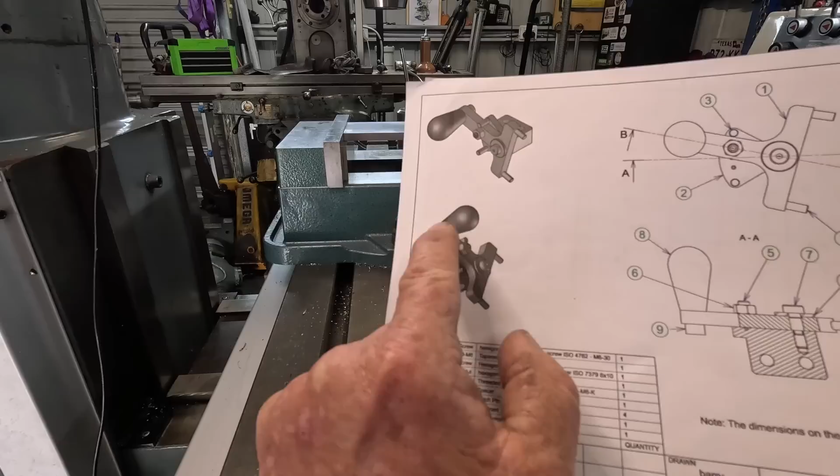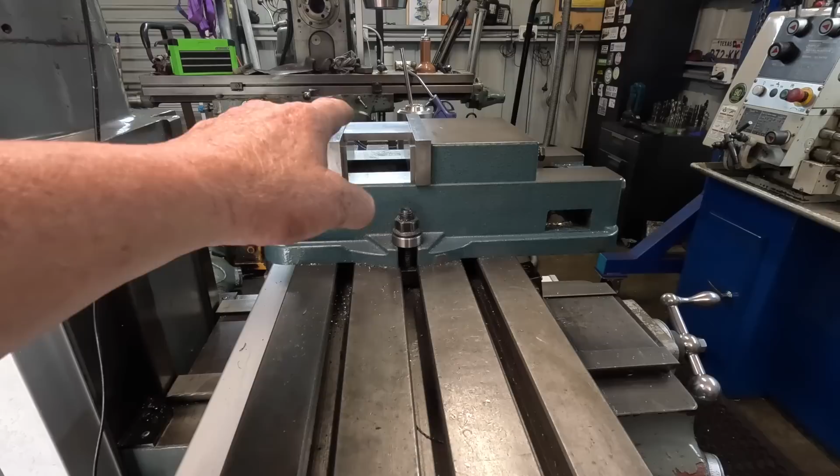So the first part I am going to build is this T handle, this T section. The big radius in this corner here is 12 mil, I think, so 24 mil hole - I'm going to bore that with the 2-inch boring head. I've set it up in the mill already, indicated and found the center line, and I'm using this back face here as a datum. So I've worked out where I've got to be in space to do these two 24 mil holes, and I've already put in these two 3.5 millimeter threaded holes in the very end of it.

I drilled that out 7/8, then I've just done a clean up pass with the boring head.

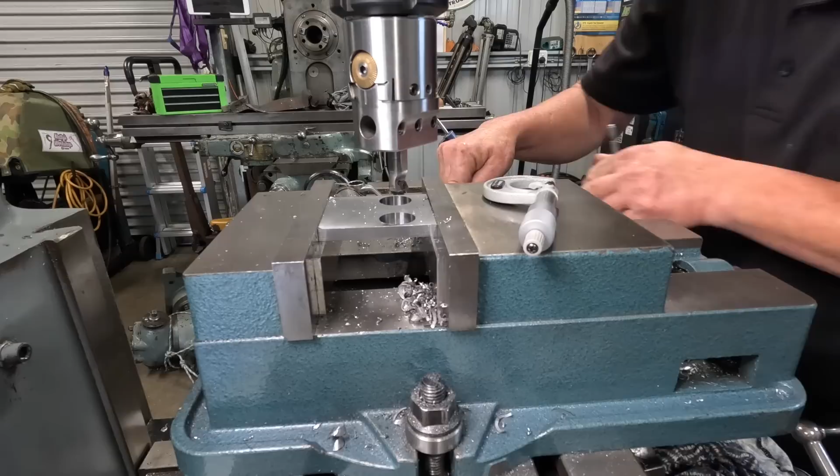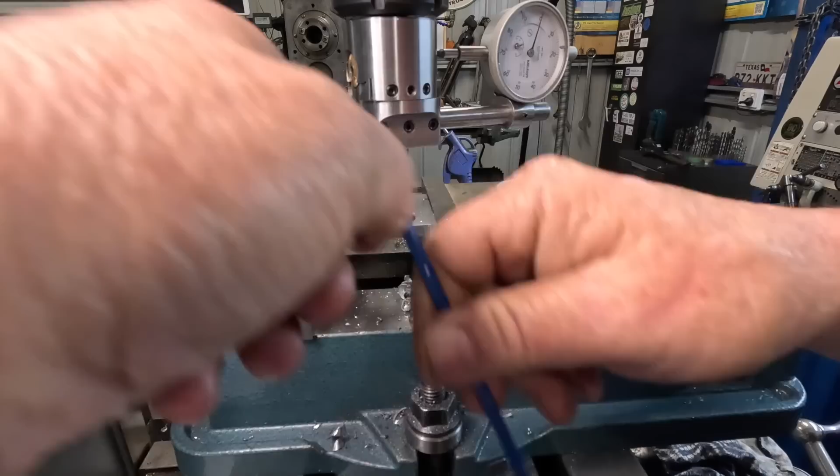.94, divide that by 2, so 0.47 to come out each side. I absolutely love that auto power feed on that quill. .24 on the knocker - pretty happy with that.

Okay, while it's set up in this position and I know where I am on centre and all that, there's some holes to put in - 3 holes on centre line. This first hole is a reamed 6mm hole. That drill bit could do with a sharpen, I reckon. This next hole here is a tapped M6. This next one is a straight M6.

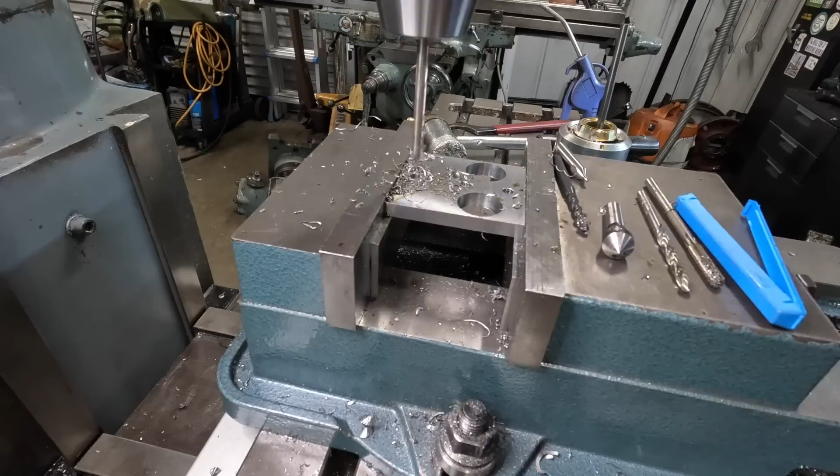So now this can be taken out, set back up on its side and start milling out all this section here. This piece in the middle will end up being 14 mil.

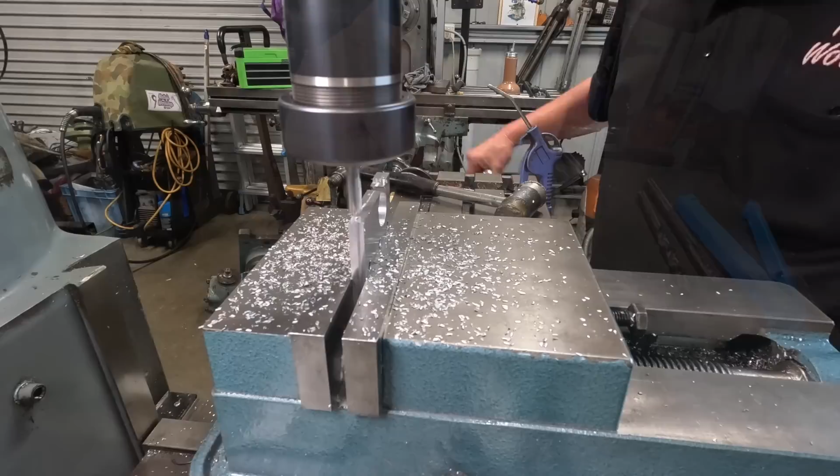Okay, I've got an apology. I set the camera to record and didn't realise, didn't hear the camera beep, but it went flat, so I missed doing this. Anyway, what do? I've got to do the other side anyway, so I do apologise for that - you really just didn't miss a hell of a lot. I've still got to radius this corner here yet.

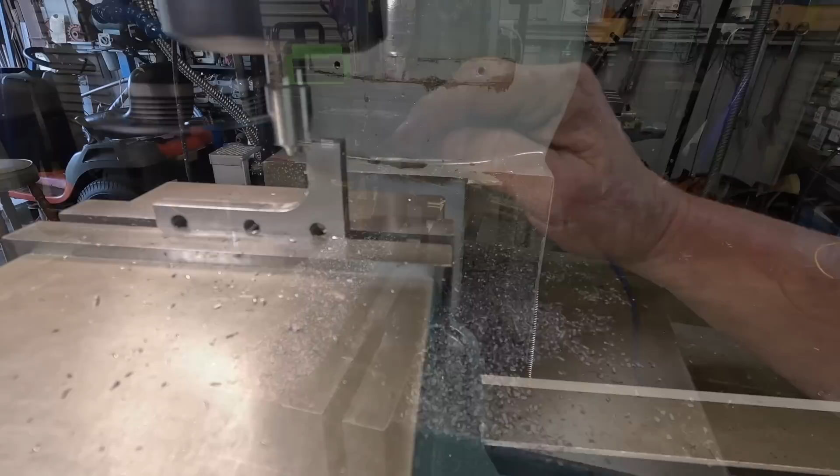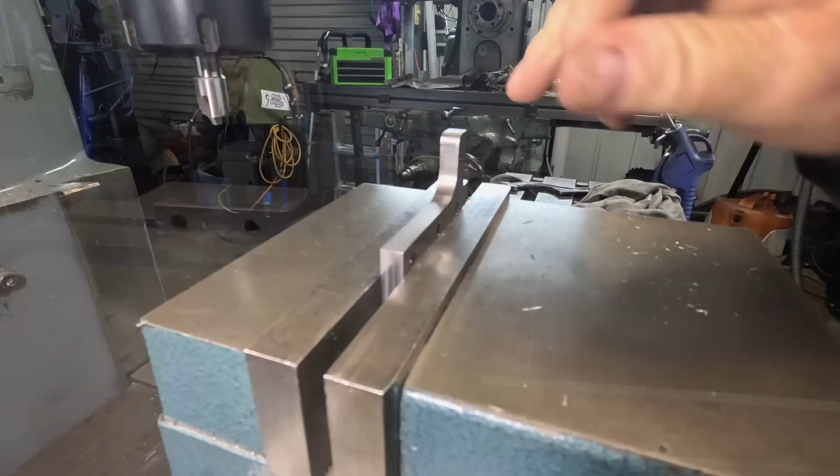Take this out now, flip it over, and hopefully machine the other side of it on camera.

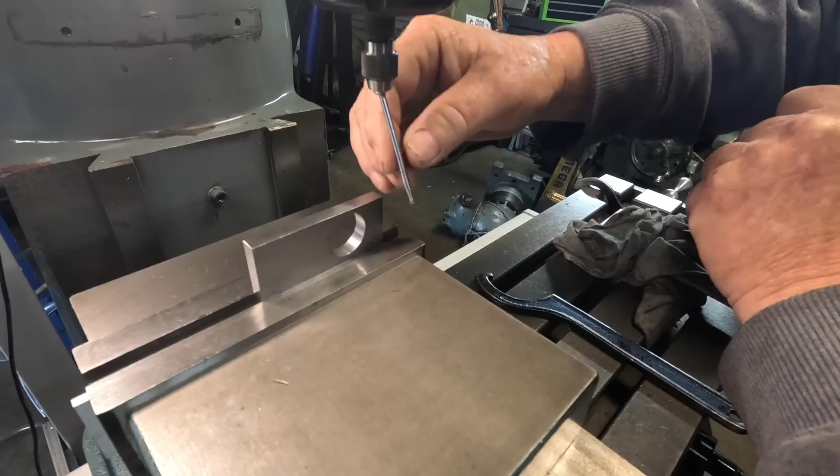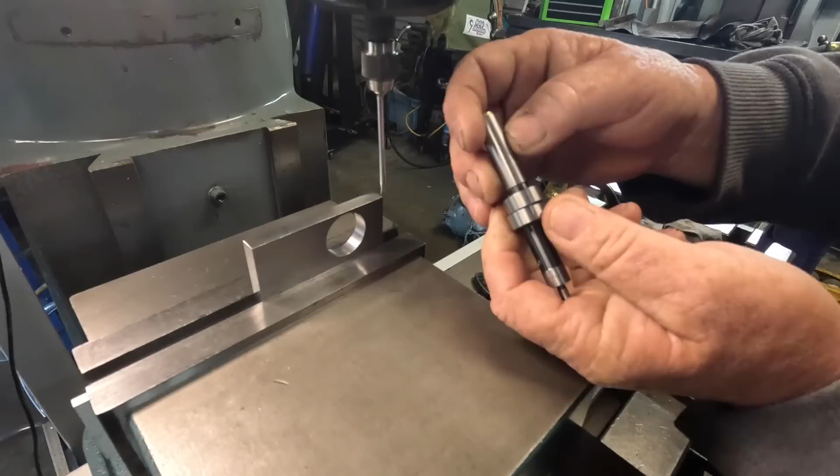I've had to go back to using this regular - it's a Starrett body and just a cheap tip. This is a Vertex edge finder and I can't get it to repeat. It's a mile off - you can set the 0, come back in, it doesn't matter how many times you do it, and it's way off. Now I pulled it apart, lapped the two faces on flat stones, just in case there was a little burr, and for some reason I'm just not confident with it. So I think it's time for the bin and time for a new one.

A bit of a fang around with a file and that'll look as good as gold.

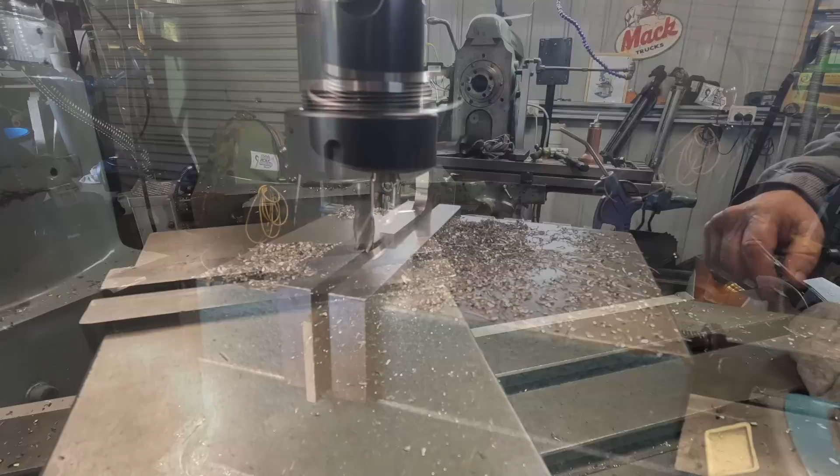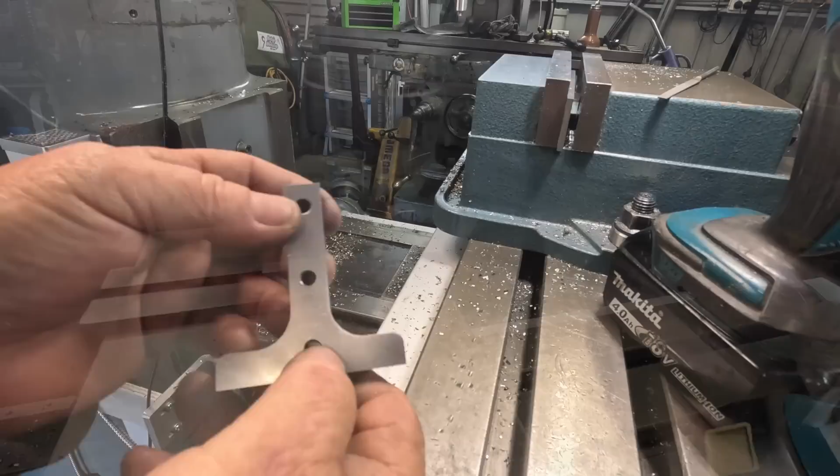So that's the part so far, it came up okay. Next time I have the rotary table set up, I'll radius the top of here. I could just make up a couple of button dies and put in there and file it - it's probably quicker to do it that way than it is to screw around setting up on the rotary table.

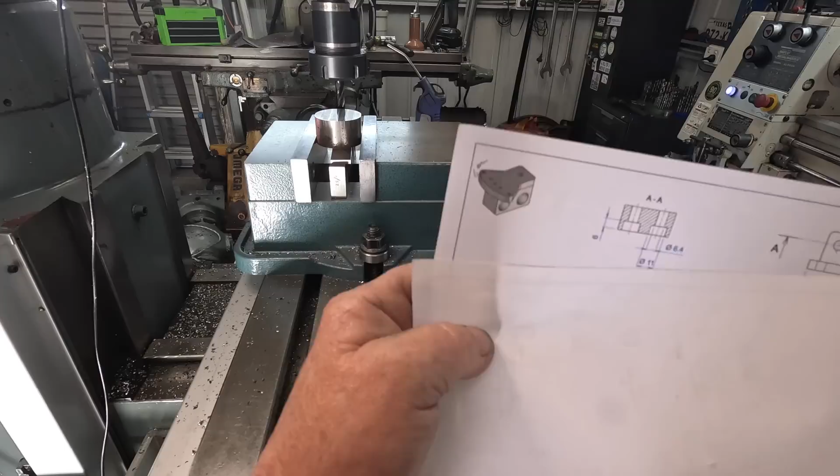Okay, this is the next part we're going to build. It's called a quadrant. There's a bit going on with this part too - got to be super careful and get this one really correct.

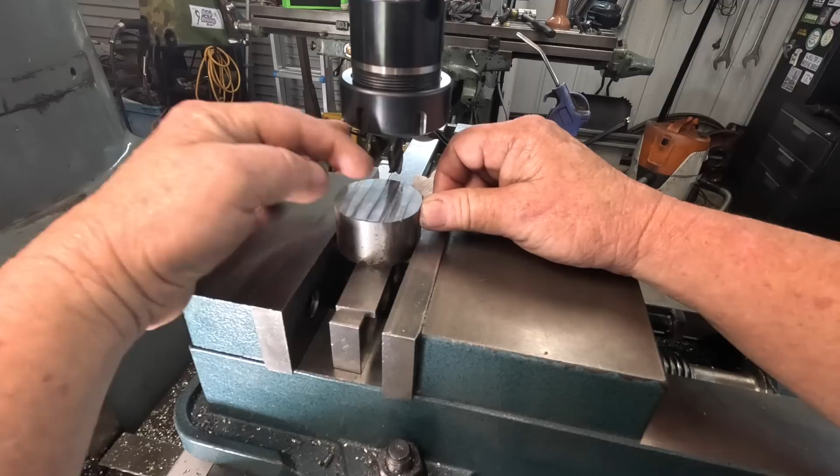So the way I've decided to hold this, because I don't have a V-block suitable, I form two flats on each side, edge find off these two flats, which put me in the middle. This first rectangle that we're going to form is 16 mil wide, so I can offset 13 mil each side of centre. It's 20 mil deep, which I have 20 mil sticking out of the jaws, and I can form these two sides.

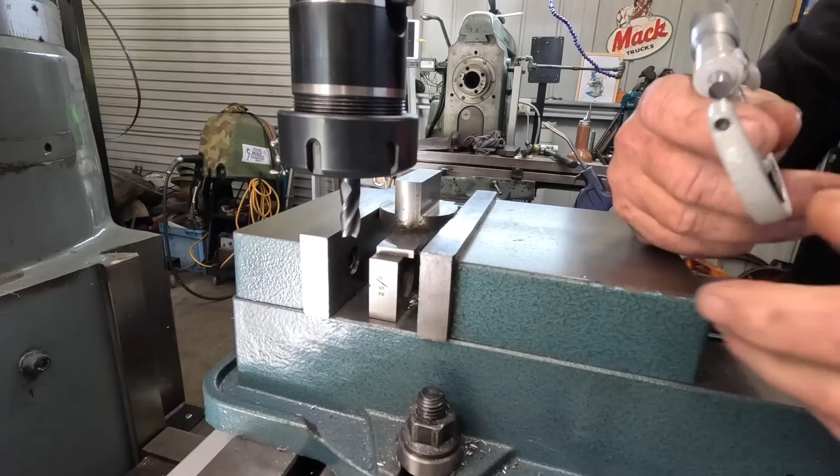This should be, theoretically speaking, right on 16. That's not bad. I'm absolutely loving this DRO.

Okay, what I've done there, the top piece of this quadrant, the back end of it, where it is square, is 19mm wide. So I've put a witness mark there, because I've got to flatten the back of this off, square this off at the back here. When this squares up and it's a full square across and matches up with these corners, I've gone far enough.

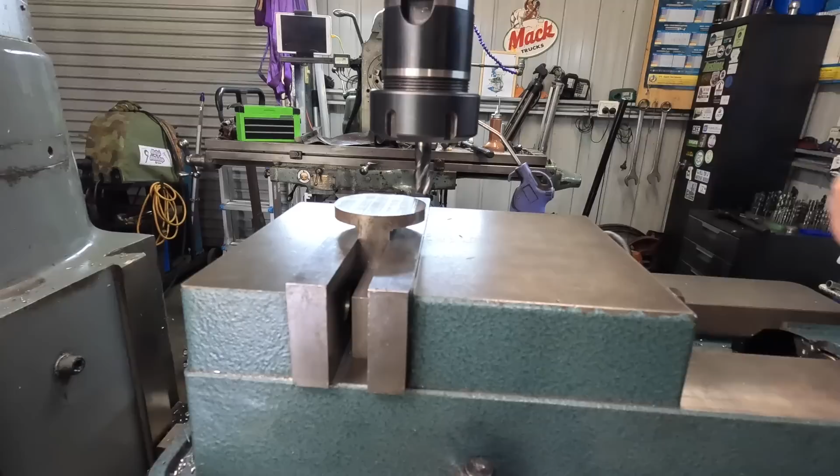Okay, I've flipped the part and dusted it off. This has to be finished at a total of 26mm from the parallels, basically. So 1 inch 23 thou and 6/10 supposedly. We're at 1 inch 24 thou.

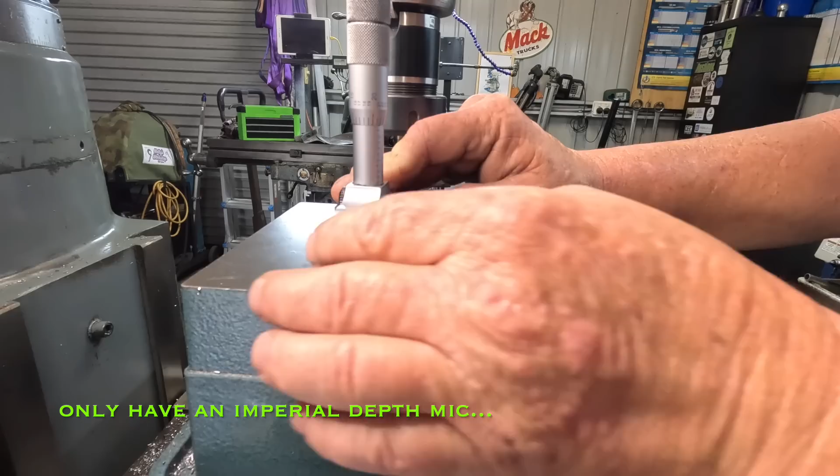We can handle that. I'm going to come in, it's a bit hard to see probably, but form the square section on the back. I know the offsets that it has to be and how far up it has to come, so that should be 19 on the money. I've just got an M5 hole to drill and tap.

What we have here is a number 1 center drill. These are a ball detent. The position I'm going to do now is the neutral position. When this goes in the rotary table and has the radius put on, then it will have another 2 holes for the forward and reverse. So this hole I end up going 1.65 deep.

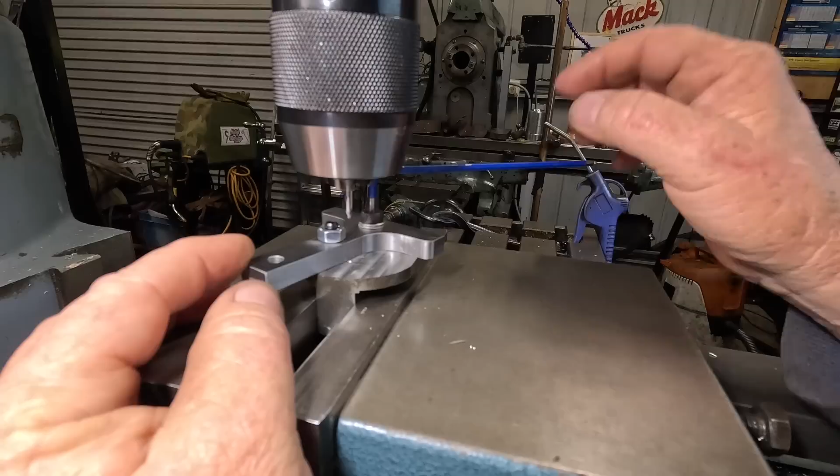I've just mocked up the handle. It's got to have a proper bronze washer made to go under this shoulder bolt, and there's a handle goes through this hole. Also, this will have a touch of thread lock on here too, to prevent it coming undone while it's being used, because as you can see it wants to. But just holding it there, moving it back to the neutral position, that's a really positive lock.

When I put these next 2 holes in, it's pretty important to get the depth of them correct, because when the boring head is moving, when you're facing something off and it hits the stops, the load that comes back onto the star wheel will knock this out of gear. So you don't want this to be too rock solid when it's in the forward or reverse position, so it'll actually throw it out of gear.

Okay, there was one step I forgot to do previously. This block here has to be 34mm long. I forgot to take this end off.

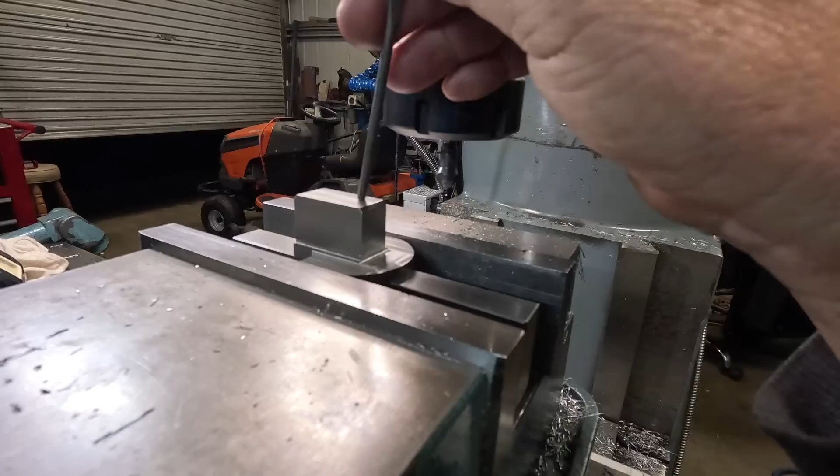So as you know, I don't hide my mistakes, and I've made a pretty good one here. The overall height of this part is 100% spot on. What I've done, I've taken an extra millimetre off this face here. So it should have been 20mm from there to there. It's actually 21. This should have been 6mm thick, it's now 5. I don't know why I've done it, but that little lip there is where I should have finished.

This mistake isn't going to affect the operation of this part. It's not going to affect the way it works. I also bumped the cutter in here a minute ago and there's a slight little mark in it there. This mark may disappear once the correct radius is put on it. So just looking at the plan and rough measurements, I am going to get rid of this mark. That won't be left in there. So this part may just stay, even though it's not 100% correct.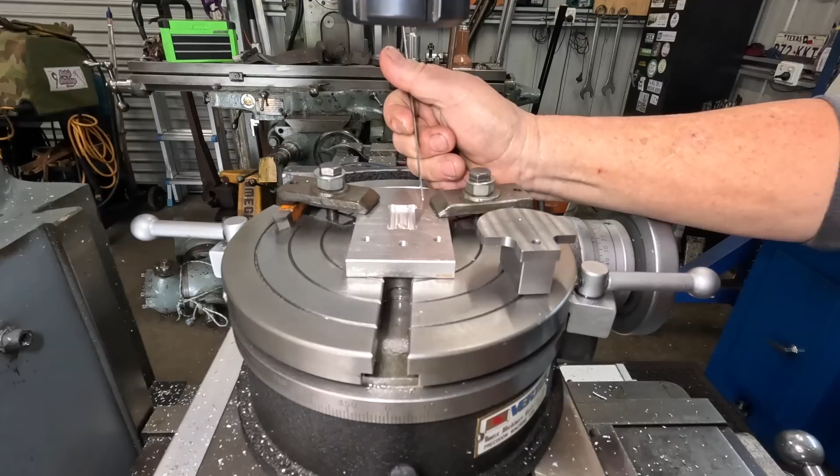Let's see if I can do a half decent job of explaining what I've done here. Piece of 10mm aluminium plate, machined the two edges, decked it off in the vise. Set the rotary table up, centered off the center bore of the rotary table, clamp this plate down, then put a pocket in using this. Everything is referenced off this center hole, so I know the distance from this back edge to this front edge from this center hole, so I created a pocket that this then sits in. 3 tapped holes, M6 holes.

This has to have a radius put on here, plus these 2 edges taken off. So the way I've done this, this will clamp down in the center hole and I'll be able to do the radius. When I go to remove the material off the sides, I can put the clamp to one side, rotate the table, and then I can get a clear run into the corner, and then obviously move the clamp over the other side, do this opposite side. I hope that explains what I've done here.

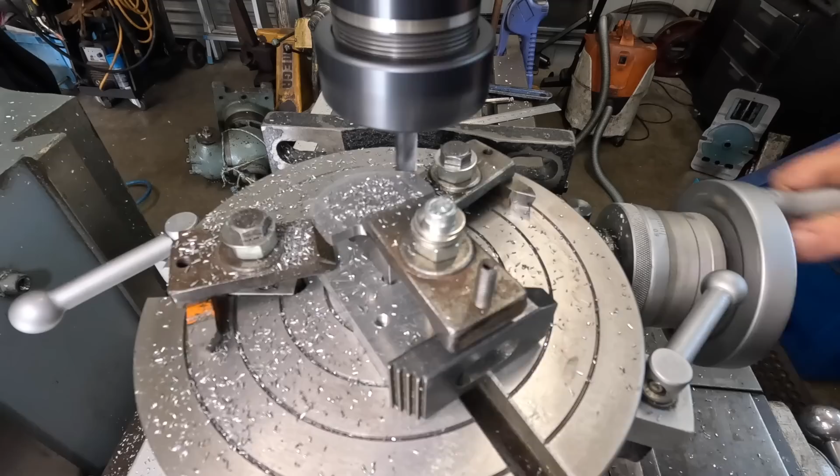Looks half right. I've decided I'm going to put in 2 M3.5mm holes. So I've rotated the table around 34 degrees, and with this 34 degrees it gives you an offset that you have to do on the y-axis to take these corners off.

Okay, I discovered that I have made a mistake here. It's fixable. When I done this cutout, the width is right, but I was 5mm too short on this length. So when I went to take the corner off, I just done a visual with the cutter over top, and nothing was lining up. So I had to make a phone call, and then we worked out where I went wrong. So my mistake.

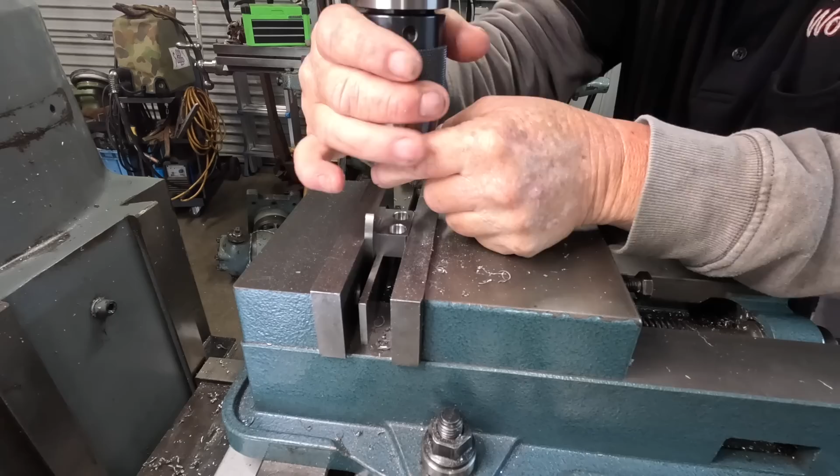That's the only countersink I had that will fit in there against this face, which is pretty ordinary, but it did do the job. Just got to countersink them 2 other holes here on the back. Mission complete on that one.

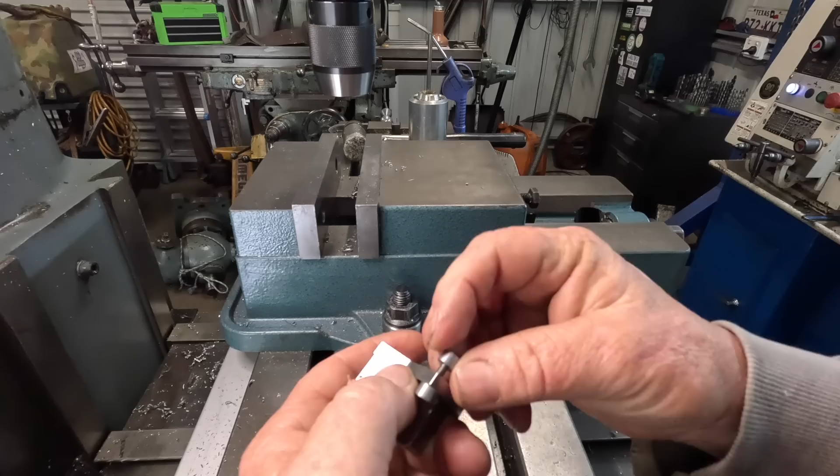I thought I'd just show you quickly what I made up for these file dies. So that's just 8mm diameter, 3.5mm thread, a little plug that's threaded as well. Screw one in from that side, which is fiddly with my fingers. That's screwed in. And this one just simply screws on from this way. You could put these back in the collet and just nip it up if you wanted to. But yeah, and just file that off. Blend it in. Okay, this part's complete.

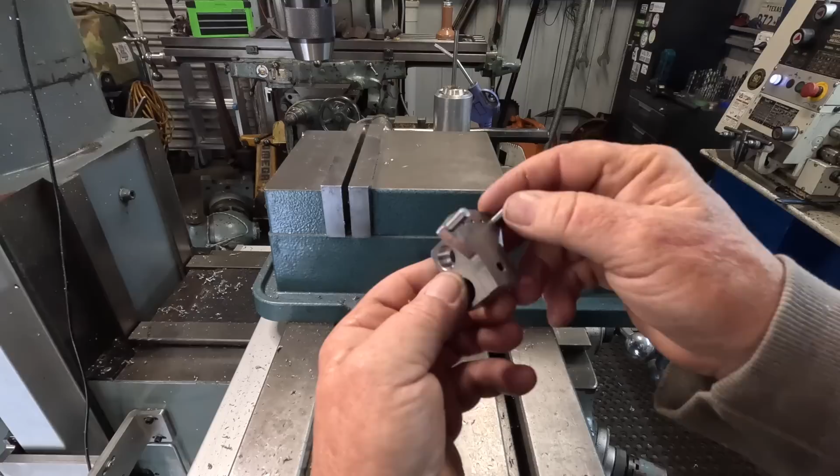Off camera, I machined up these 2 little silver steel pegs. You don't even have to turn the outside of it down. All you do is just turn the piece for the thread and then thread it 3.5mm with the die. So it wasn't worth showing that. The radius has turned out okay. It's looking pretty snazzy, I reckon.

Okay, so I've rounded this end off and fitted the handle. I also made up the other 2. They're only 3/16 silver steel, just with a 3.5 thread on it. I also made up a bronze spacer. Now you make this oversize and then use a bit of wet and dry on a flat surface. I used my round table and got it to the right thickness. You got a shoulder bolt, fits on there like so.

Now the idea of rubbing this back to the right thickness is you've got to have minimal end float, and still be able to move freely. Backed it off a touch. Too much. It's a fine line between too much and not enough. Pretty happy with that. So that's a completed component there that needs a good clean.

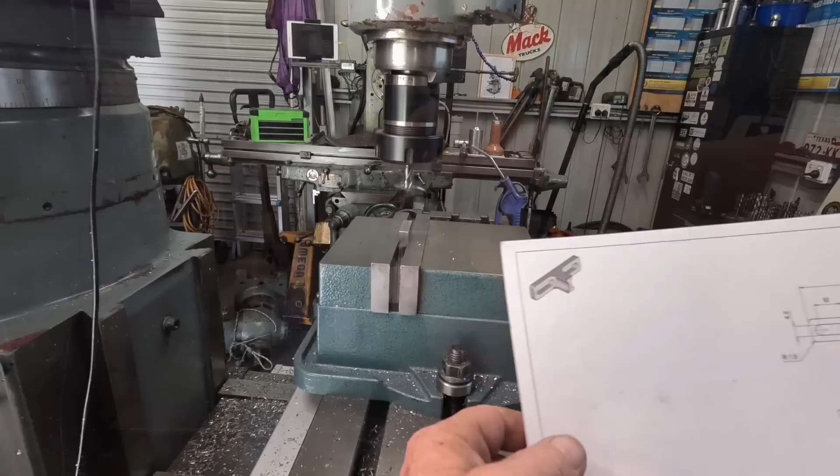Okay, our next component we're going to build is this stop. Adjustable stop that goes on the side of the main body. So it's a pretty simple little part to build. Okay, I've got the part in the vise that's dimensionally right, length, width and height. There is a small radius in this corner here on each side, 2.5mm radius. I did have a set of parallels under here, but I took them out because these holes are going to go all the way through.

Rightio, I have stood the part up its correct way up, if you want to call it that, and edge found the centre in both directions. There has to be like a 5mm rectangle left at the top. It does have a 4mm radius on each side of that. I've got to end up with a 3mm flat at the bottom as well. It'll all come clear when it's done. You'll know what I've been trying to say.

So this has to have a 4.2mm wide slot each side. It is going to be hard for you guys to see putting this slot in because there isn't a lot of room. This is a 4mm cutter. The end's pretty buggered on it. It's the only one I got. See how it goes.

Now before you all start nailing me, it's not the right way to do it, and I should have done this before I started. This should have been the first operation I done, was the radiuses, 1.5mm corners. So I'm going to dodge it up and try and do it this way.

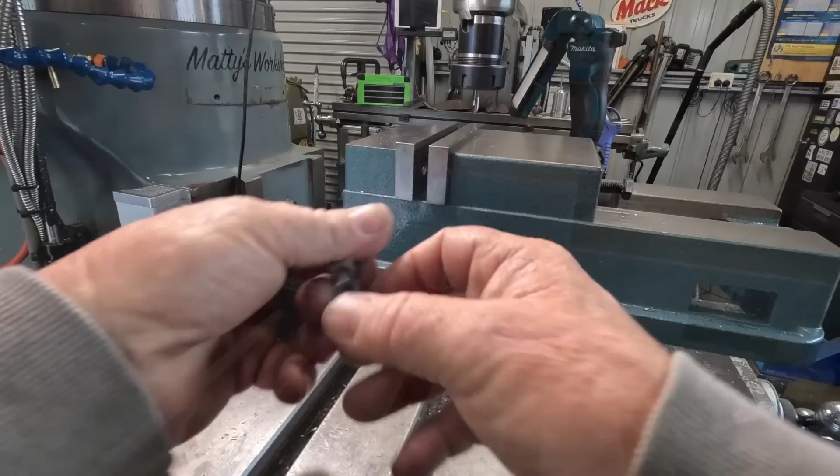Okay, you see me do 1 radius quickly. I slipped around and done the other 3, but they may not be perfect. The part may not be 100% perfect, but it's pretty bloody good, I reckon. So that can be put on the boring head now, and it'll make sense.

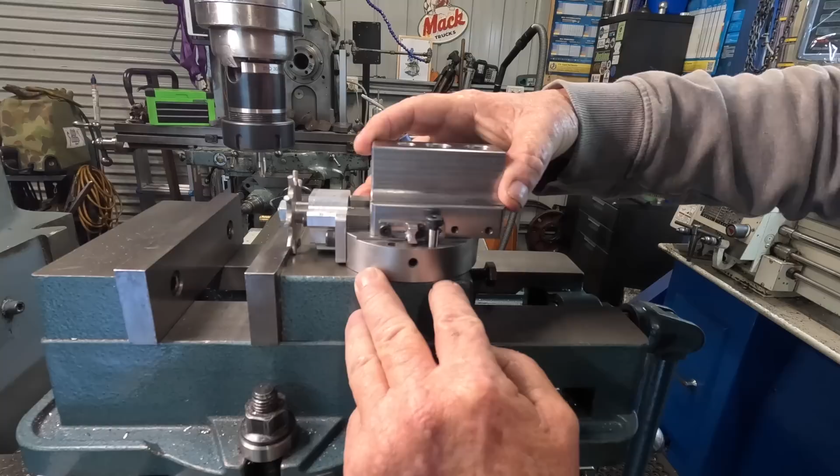Okay, I've got this adjustable stop fitted, so it can be moved. You got 10mm of adjustment that way. You can move it up to this set of holes as well, and there's another position there you can put this post in. So if you're feeding back the other way, you can make that as a stop. You pretty much got stops all the way along its travel. It don't look too bad, eh?

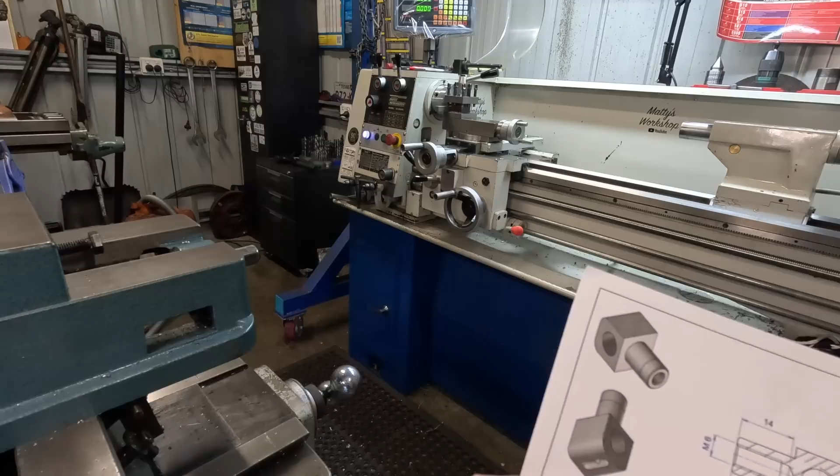Next part is the feed screw nut. I think I've got a plan on how to build it, but it is pretty important where the depth of this stem or this face here is in relation to the 10x1 thread. Got to get that pretty spot on. So this is made out of bronze. Our first dimension we need is 10mm for a length of 15. And that's going to have an M6 thread up its guts.

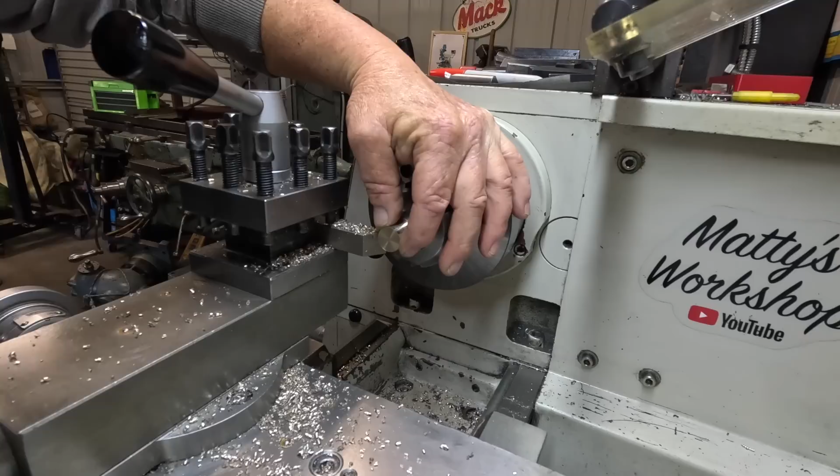I'm just thinking I might put that M6 thread in there now, just in case when this is 10mm, and I drill it and tap it, it may swell it a fraction. I don't know, it may not, but...

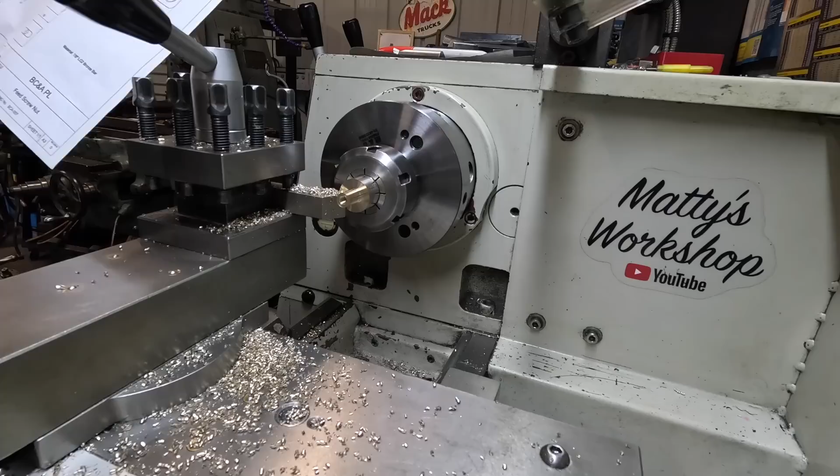.99. It can be nominal 10 with an F7 or F8 tolerance, which is 9.97 to 9.99. For a length of 5mm from this face, it has to be down to 9.9. Okay, this 9.9mm dimension had to be 9.9. Well, we're just under the 9.9, so yeah, 0.005 if you want to call it that.

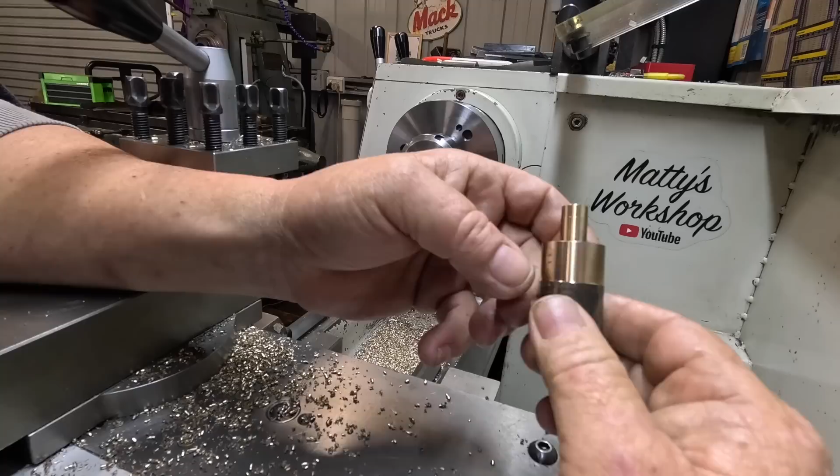This can come out and go into the mill in a collet block holding onto this 10mm diameter. I think before I put it in the mill, I am going to turn this around, hold it by this diameter and part this excess off.

So I'll explain what my theory is here. The length of this boss, if you want to call it, has to be 14.5. I parted it off over length, faced it off. Now I've got the measurement, which is 17.33. So I can bring that to dimension now without having to fluff around and take it out and measure it.

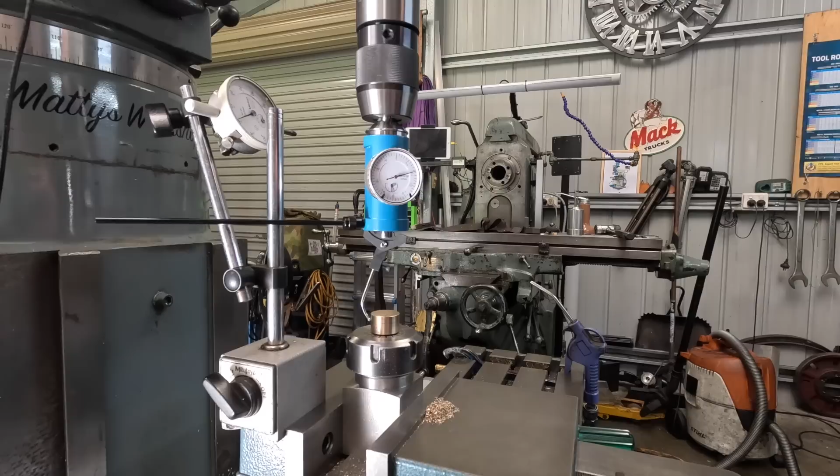Okay, this is about the best I can get it. That's going to have to do, so start forming the square now. 16.01, I'll leave it at that. I'm pretty happy with that.

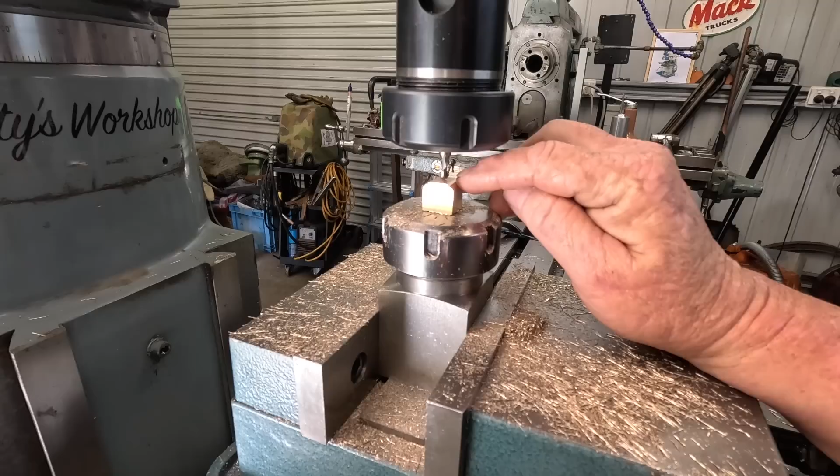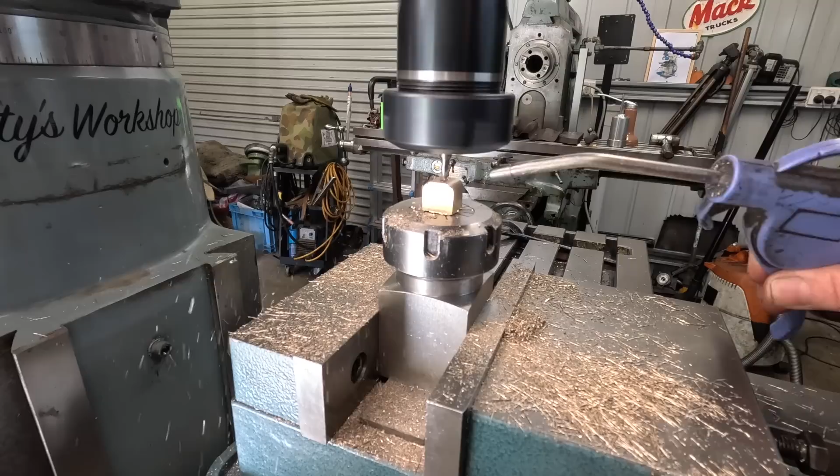Okay, I've got a 2mm radius ball nose end mill, if you want to call it that. Has to be a slot put in. Now this is where the oil will go down and feed into the feed screw. 8mm long, 2mm deep, so I'm just going to see how we go here. Okay, that's that part in.

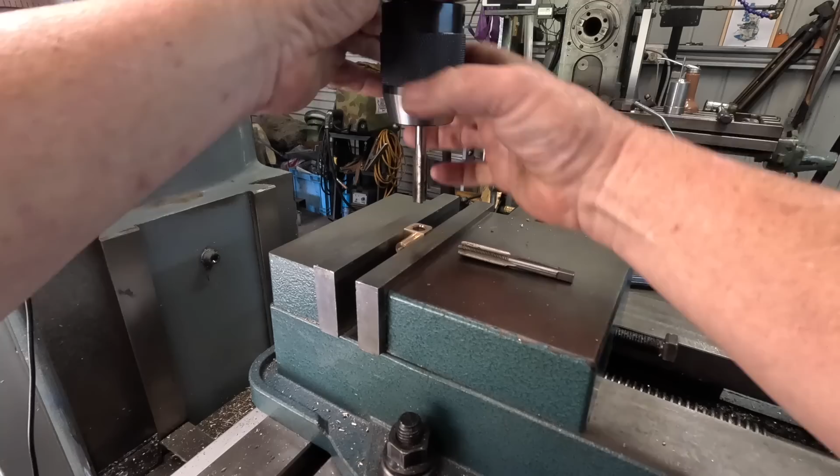Now it does have to be a 3mm hole drilled down, which intersects with the threaded 10x1 hole that will be in there next. But I'm thinking I may put that in after I put this thread in. I have two 10x1 taps. These are out of a Kincrome set I own. I don't know really honestly what they're like, but I'm going to find out pretty directly.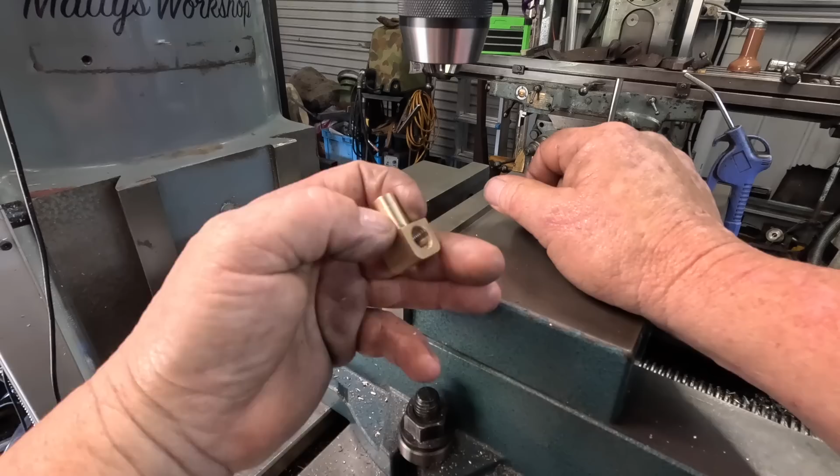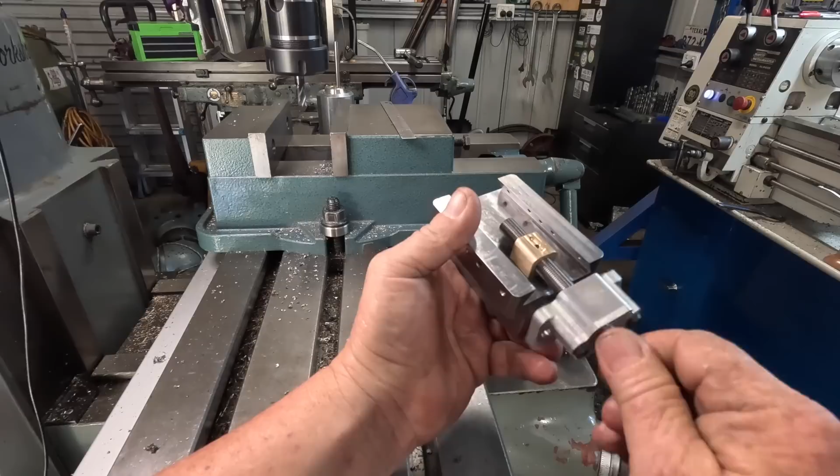It actually don't look too bad, that thread. Okay, I've set it back up in the vise to just pop this 3mm hole back through. And that looked just pretty. Give that a good clean out with some brake cleaner. And that part's finished. Okay, so it's in there. Happily fits and screws all the way in.

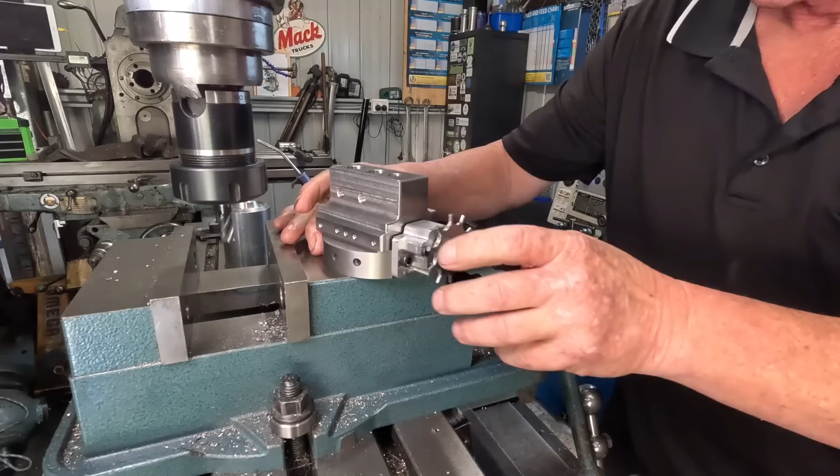So I'm going to assemble the slide onto the base and bolt all this back up. There's a 6mm cap head bolt through that side, it's what retains it. It's not obviously done up tight yet, but I'll get it together and see if it actually all works. Well, here's a bit of good news. We have success. The nut's done up tight, bearing housings done up tight. So I must have hit the numbers pretty good. That's an achievement, eh?

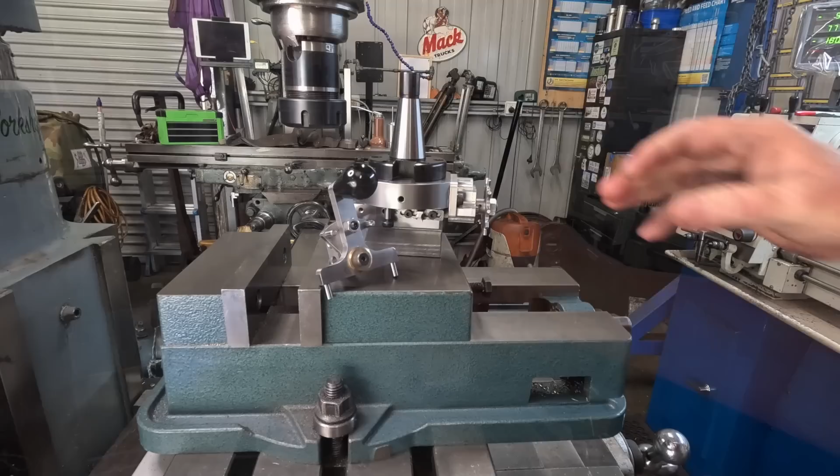That wasn't a bad effort this week to get all this made. It was quite interesting really, and it's finally awesome to see this moving by itself. And yeah, I'm pretty happy. I still have to broach the keyway in the star wheel, and I still haven't got my 3mm cutters to do the key in the feed shaft. So yeah, still got to do that. But apart from that, we're getting pretty darn close. Next week, I reckon it'll be mounted to the mill and ready to do its first spin, which will be pretty exciting.